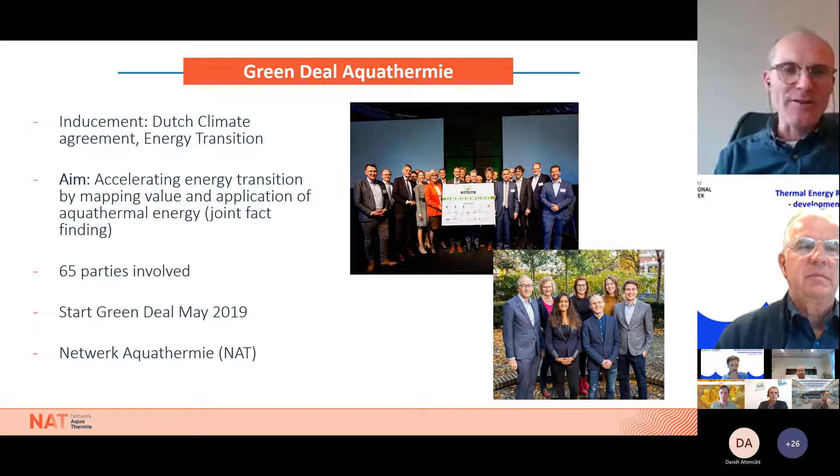Okay, and then I'll fasten. I had specific knowledge challenges on technology, on the potential itself, and how to fund it, how to do the governance, which role does everybody play, which party, and of course the impact on the environment, so the impact on the water system and the ecology. I will fasten through this really.

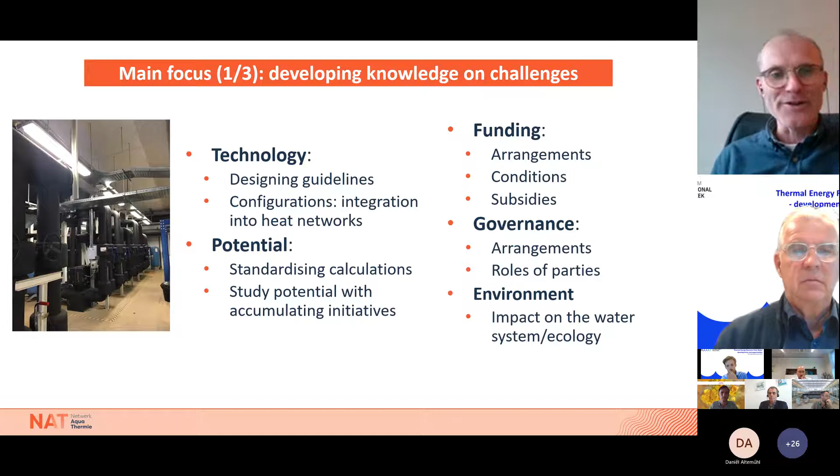So next one, to number 8. Then the sharing of the knowledge. We wanted to share the knowledge not only within the parties involved with the Green Deal, but also everyone who gets involved with the energy transition and the heat in the built environment specifically.

So we built this site. We have an inventory of the realized projects, and we put that on aquathermie.nl. Of course, on social media too, and we had communities of practice, for instance.

To number 9. And then we try to broaden and deepen the network. So more parties should be involved, and everybody should know about the investigations we made or other parties have made. So we try to really centralize the information in total, and of course securing this knowledge through agreements with several parties.

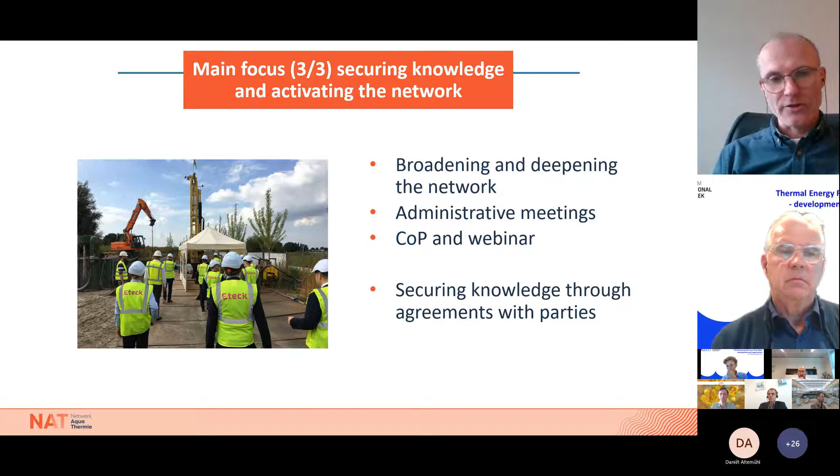So to the next one, number 10. What we see is that there's a really rapid growth of initiatives, even more than 125 now. And well, we made a sort of forecast that we think 200,000 households could be installed with aquathermal energy in 2030.

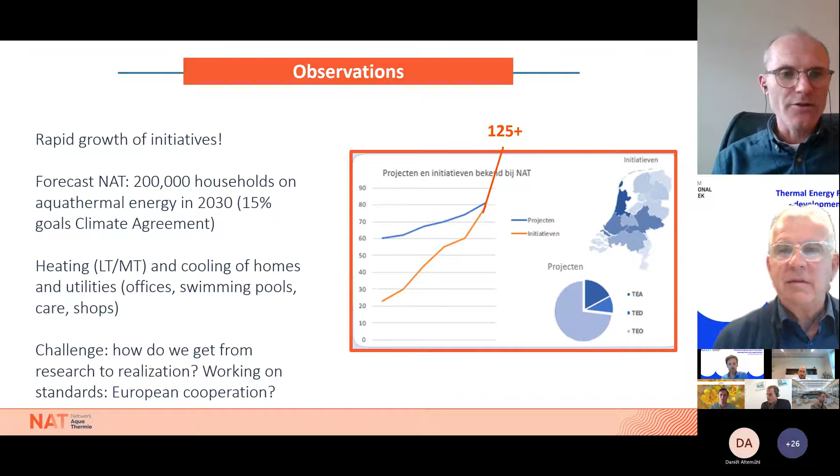One of the main challenges is how do we get from research, with what we've done the last 3 years, to realization. Maybe it's possible to work on European cooperation. So this could be a start today. And this is actually what I wanted to present.

To start off with, I want to focus or get your attention on some major challenges we have in the urban area. One of them is energy transition. We heat our houses with natural gas, and it has to be replaced by a sustainable system. This has a large influence on people's neighborhoods, inside their houses, and as we see now, also in their wallet. Water quality is suffering from an abundance of nutrients, often combined with a lack of flow, and that causes algae growth, especially in the hotter summers.

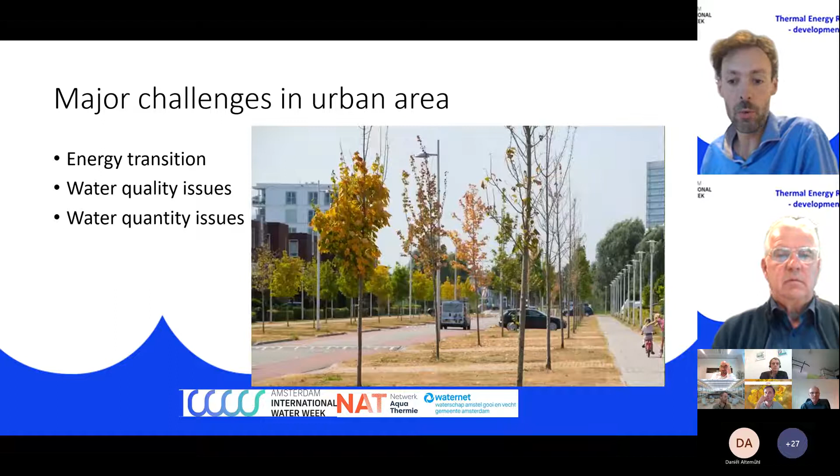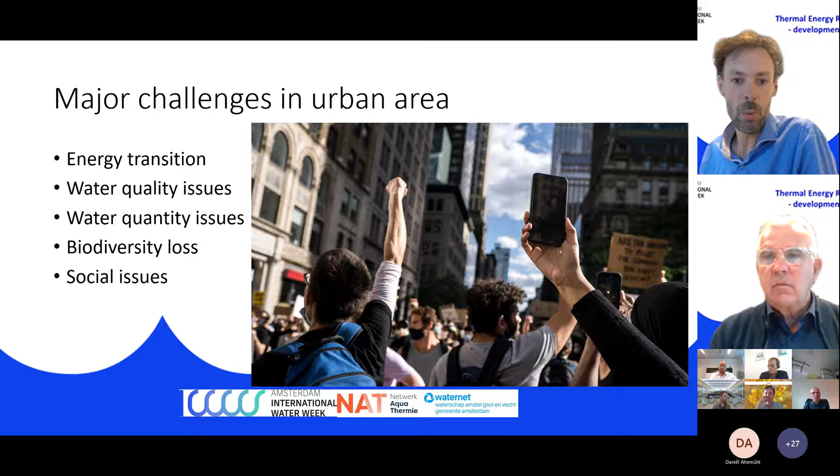With climate change, we see longer periods of drought and more frequent intense rainfall events. Biodiversity suffers from a shortage of green space and often also monocultures. And with all these problems, and many more that I haven't mentioned yet, people are getting continuously challenged by those changes, and they raise their voice to object against the impact it has on their lives. So if you want to tackle these challenges, we need to come up with integral solutions. We cannot afford to think per sector. We need to look for a more integral, sustainable way.

So let's have a look at the thermal energy recovery from some surface water and how this process works. Henk has already told you about this. Our goal is sustainable heating of houses and buildings, and the means we have is heat from surface water.

What we actually do is pump large volumes of water through a heat exchanger. What do we need for that? Pipes underneath the ground, and also a technical building where you extract heat from the flow.

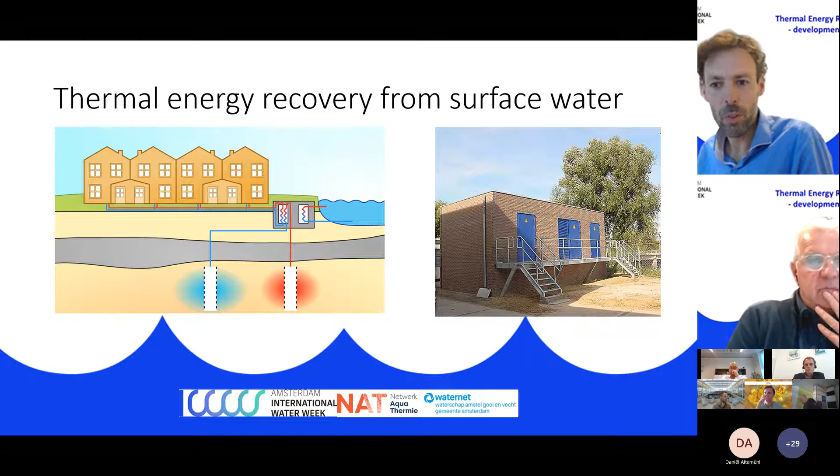The energy transition stagnates if current methods of city development remain unchanged. So we have to deal with it differently than we're used to. Then the thought came up to us: what if pumping is an enabler for the integration of sustainability? What can pumping do more than just extract heat?

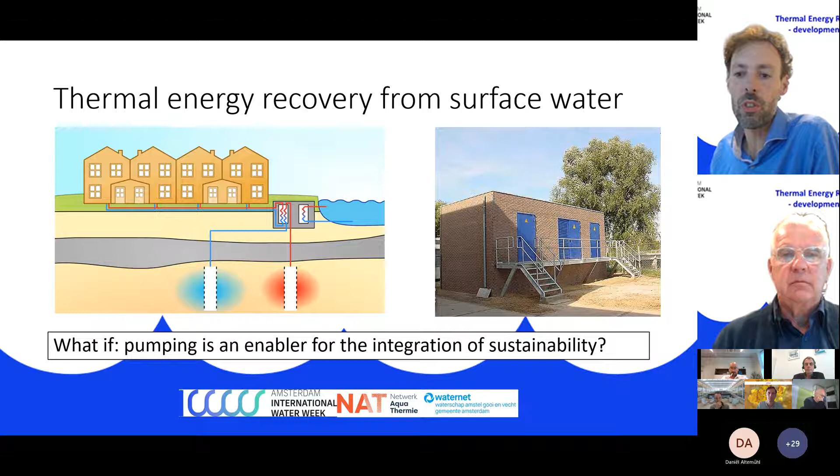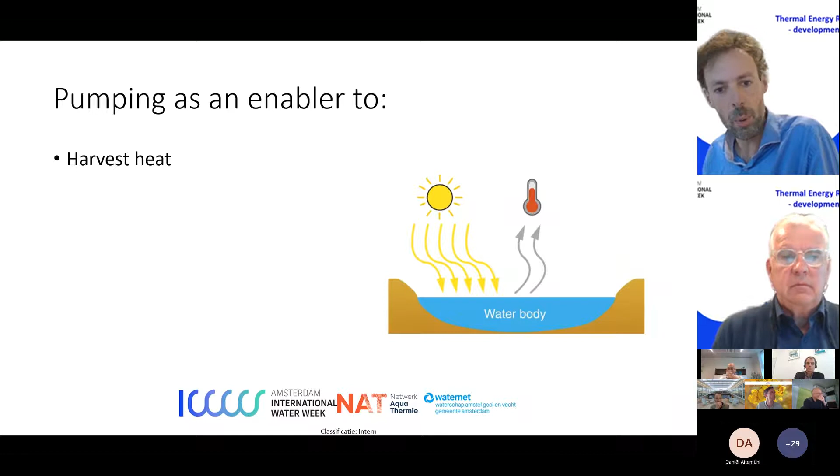So we continued from there and researched this question. First, by pumping water through a heat exchanger, you can harvest heat. But also, if you pump water, you already have it in your hands, and that gives the opportunity to filter nutrients. There are often too many nutrients in our water system, causing algae growth, so let's get rid of them.

We want to increase biodiversity, which can happen if you start pumping water in the ditches. Water starts moving, and that can cause water quality improvement, but also by cooling water, there are opportunities to improve the biodiversity.

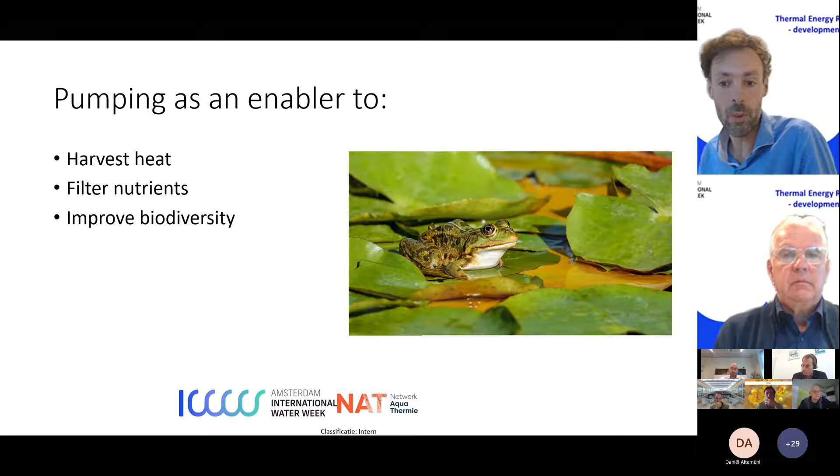After heat has been recovered from surface water, what we do now in the thermal energy project is hide the stream - we put it in a pipe and it returns to an open water body. But we miss an opportunity here. We might as well show the water returning over land instead of hiding it underground. This gives opportunities for recreation, but also for biodiversity when designed in a nature-friendly setting.

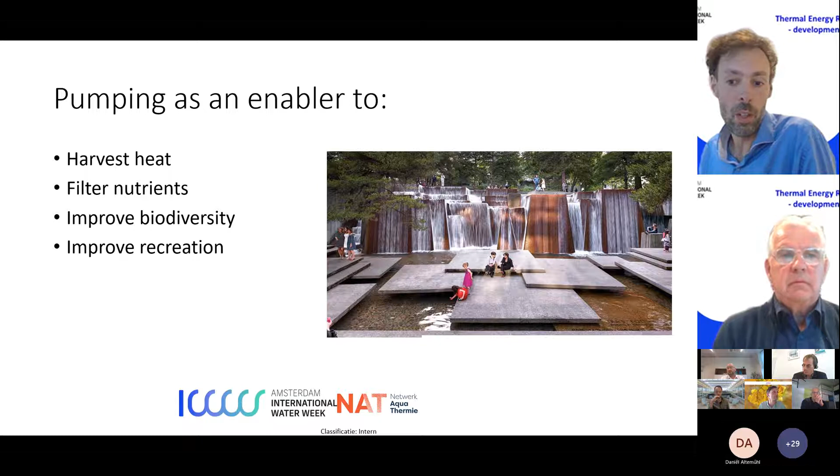We can also improve water management by, for example, infiltrating that returning flow of water into the ground in periods of drought, or maybe drain the ground in periods of rainfall.

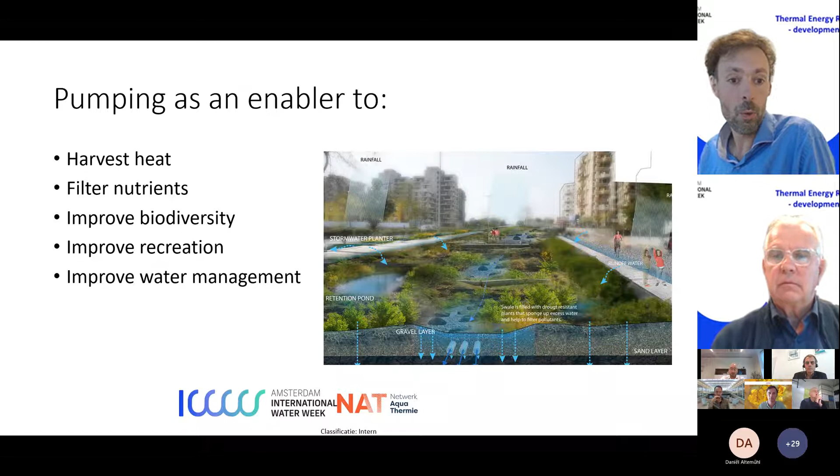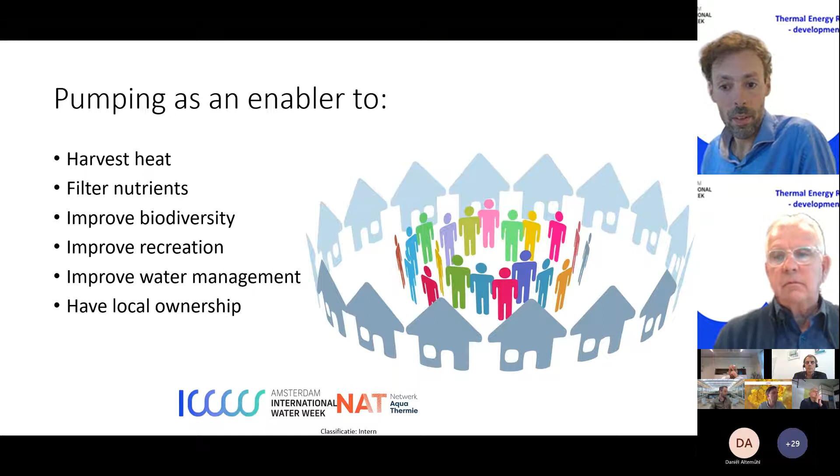As Henk already said, this system is very local, and that gives opportunities to have local ownership. People can organize themselves in an energy corporation and have their own heating company with heat from the neighborhood for their own neighborhood. That last thing is happening right now in the neighborhood called Oostoever, in Amsterdam.

The story I just told you, we took that along and went to the local energy corporation, and they said, okay, we have this idea and we want to challenge you with some questions.

This neighborhood has about 1,100 houses. It's built at the end of the last century, and it's next to a large lake, the Sloterplas, which has water quality issues due to an overload of nutrients flowing in from the surrounding area.

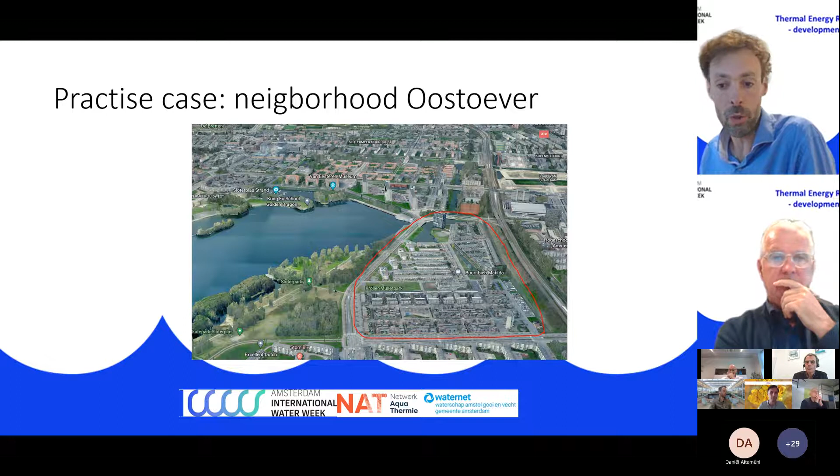First thing we did is we used our online tool, the omgevingswarmtekaart, and the tool is a fast way to figure out what the heat demand is of a neighborhood, but also what the heat availability is from different heat sources in the surrounding area. This tool shows that there is enough heat available.

Heat is available from the sewer systems, but also from the Sloterplas. It's very large, so there's more than enough to heat, I think, up to 100,000 houses around there - or well, let's say 30,000 from the models, but I think it's much more. So it's more than enough for this neighborhood. So we chose this surface water body as a source for this neighborhood and continued from there.

We wanted to look for integral sustainable solutions - so not only extracting heat from surface water, but what other sustainable goals can we achieve?

To do this, we applied a method called the integral design method, geared to programming public areas in an integral manner. In this method, public and private parties work together from an early stage, and the goal is to connect multiple opportunities to ensure that developments lead to a better social and healthy living environment.

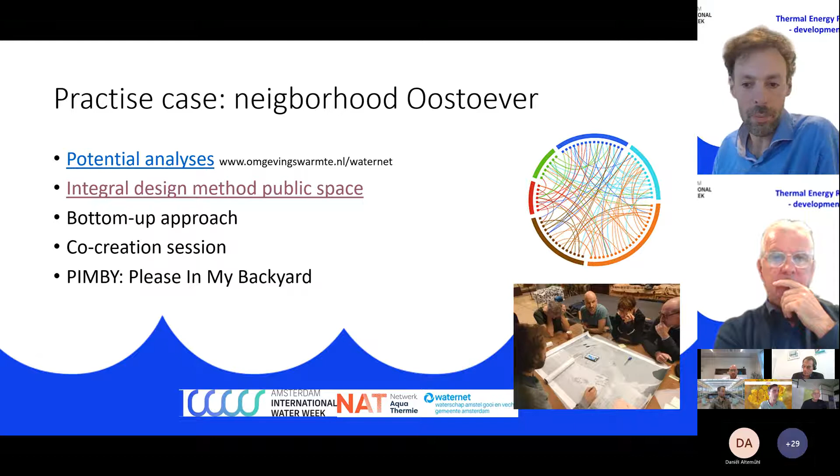We also asked the residents under what conditions they would gladly have a technical room in their back garden — so, PIMBY: please, in my backyard. In the next slides, I'll show you the results from this exercise.

First, we looked at how the building could look — a technical room — and we came up with different shapes, maybe with a street artist's work on it, or packed with green walls.

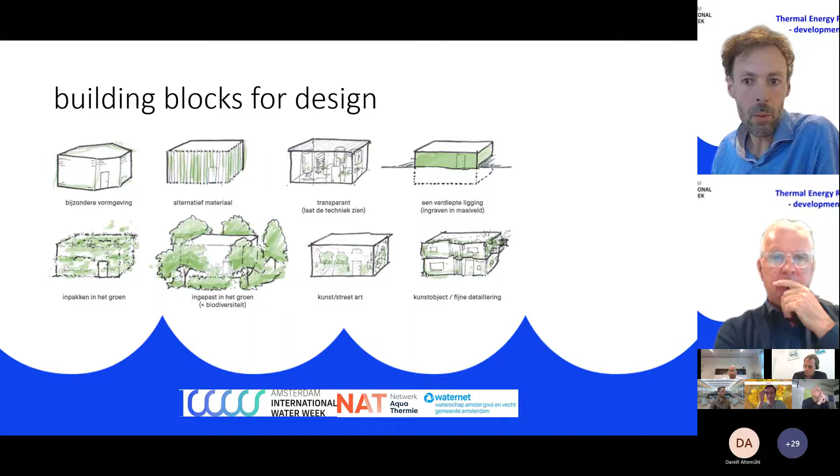We also looked at the outlet, as mentioned before. You should maybe show the water instead of hiding it. So it could be a fountain, maybe a cascade, or a playground for kids, a pool.

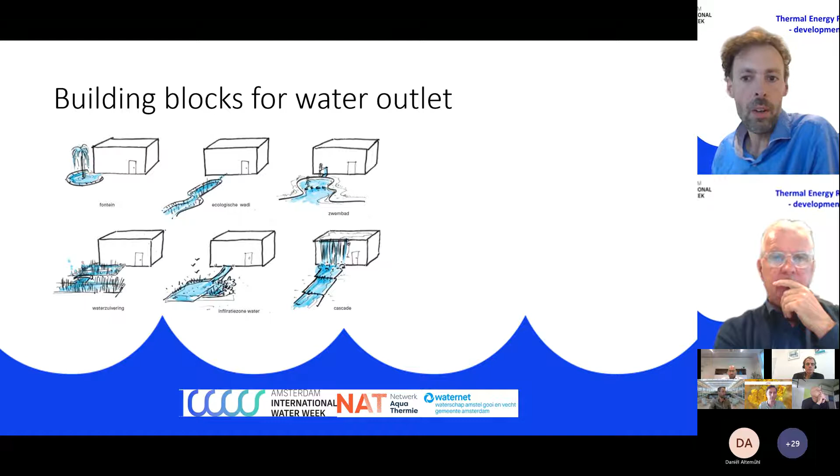We looked for multifunctional use of the building — not only a technical room, but maybe a play object, or combined with a public space utility. For example, a public toilet, or lockers for people who want to go running and store their shoes. It's next to a lake, so maybe swimming equipment.

It could also be a landmark for the neighborhood as a recognition point, or a way to invite people to see what this new technology looks like, or you can make it part of nature. There's a park zone as well, so maybe you can make it part of that park zone.

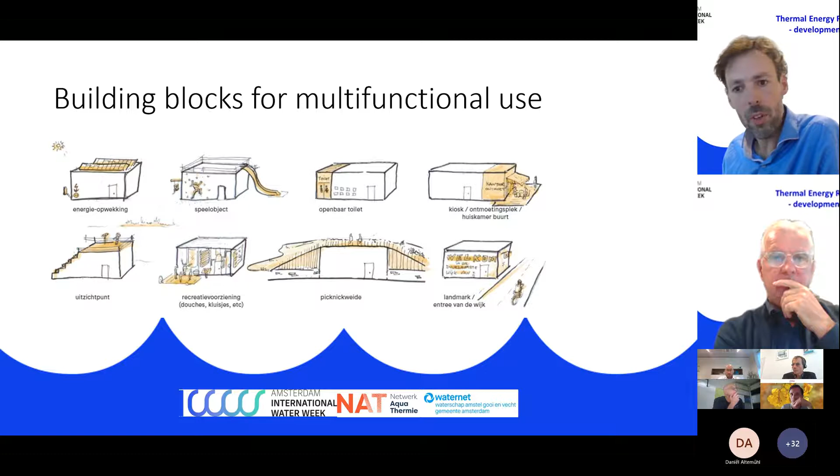The residents came up with all these ideas, and in the end we focused on three different solutions. These possible solutions are concept ideas. I'm going to show you one of them.

There are old fermentation tanks in the area. It used to be a treatment plant, and we thought all these tanks were used — one is an apartment, for example. But the residents pointed out that one of the tanks is probably empty. It has no roof, and at first it was thought to be a storage place for water.

We found out it's probably empty, and it's of course a very nice idea that you have an old building that's not being used. It used to have a water function, and maybe you can use it again for the new water function.

Then we found out that the ditches on the back side of the area have bad water quality, mainly because they're not flowing. The idea now is that you can pump water from those ditches, bring it through pipes not too far, to this old fermentation tank, harvest the energy there, and then let the return water flow towards the lake and make it visible.

How, we don't know yet, but make it attractive to the neighborhood. Then, before the water enters the lake, have a reed bed filter to filter the nutrients. This is the basic idea we have right now, and it has to be further researched in a feasibility study.

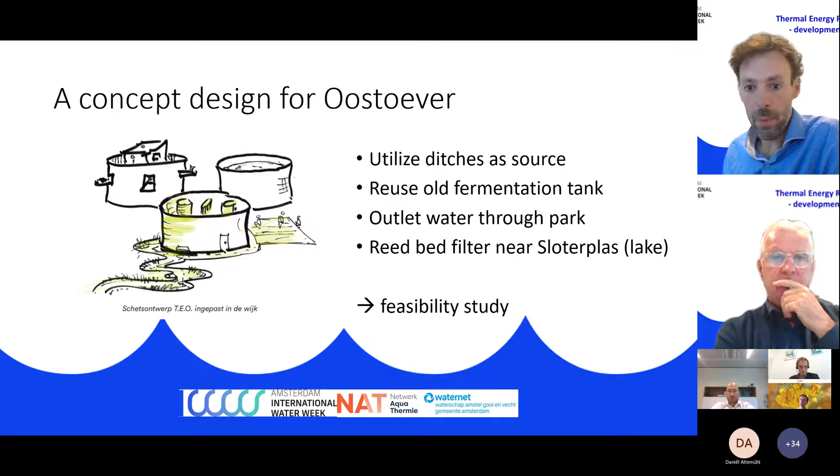Thank you very much, Harry. That's a very nice statement you made at the end — let the customer be first. There are a few questions. Is the ambient heat map usable at EU level?

I wish that would be true. We put a lot of effort in there to make it usable for our own area. Other water boards or water organizations are starting using them as well. There's another map, I think Henk already told us about that, used for a national level. I think any country or area that really wants to push this technology forward needs a map like that to make it visible and accessible, so it's easier for parties to hop on and exploit this technology.

Okay, thank you. And another question from Michiel: does it take into account existing systems, thermal, in outflow of those? The map I just showed? Yes. So for example, the high temperature district heating system is also in there. So any source of heating is included in the map.

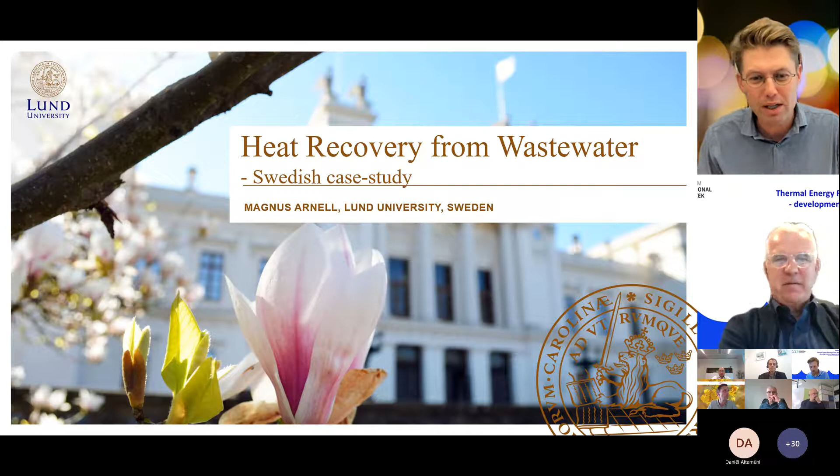Thank you very much for the kind introduction and for inviting me to come here and present to you. I hope you can see and hear me and see my slides. Excellent. So I will focus primarily on heat recovery from wastewater. And you were asking for a term, and the one that we have been using is wastewater heat recovery, so in short, WWHR, that I will also use in this presentation.

So if you look at the urban water cycle, from extraction of raw water, production of drinking water, distribution, using it in households, collection of wastewater, and treating it before discharging it back to nature, 10% of the national energy use typically goes into the urban water cycle, and 90% out of that is used for heating of tap water by customers. That means there's a large energy potential being practically wasted today.

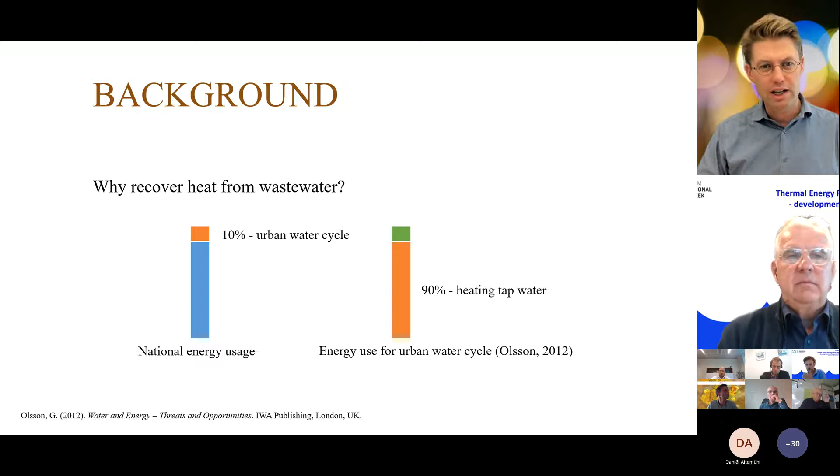And it is possible to recover this energy. It could be done in household appliances, primarily showers, but also washing machines, etc. It could be done on building scale, on the exit wastewater from buildings. And doing it very much upstream has a higher temperature. On the other hand, a low and quite variable flow, making it more feasible typically to do it with heat exchangers rather than heat pumps.

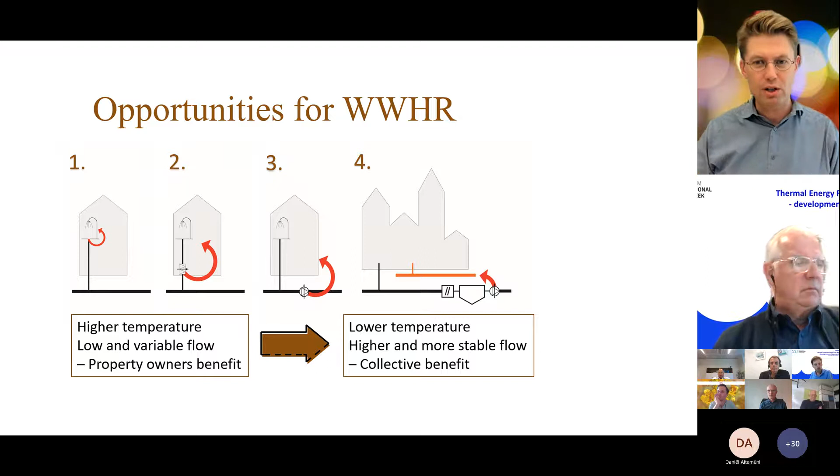Then we can also do it in wastewater sewers, and in the end at the effluent of the wastewater treatment plant. Doing it down closer to a treatment plant or in the main sewers, some of the energy is lost to the ground surrounding the sewers. But on the other hand, the flows are higher and typically more stable, and that means we can do it with heat pumps. Another important difference is that if you do it on property level, typically the property owners get the benefits from the heat recovery, while doing it downstream, it's more of a collective benefit for the utility or the utility customers.

So is there then a risk with doing heat recovery in wastewater? Now I will be talking very much from a Swedish perspective, saying that Sweden is a cold country. We have a cold climate, and that means the wastewater, the raw water, is typically quite cold during winters. And the wastewater treatment plant biological treatment processes rely on the heat that is also added via the hot tap water.

Recovering heat upstream of the wastewater treatment plant poses a risk of lowering the influent temperature, thereby impacting the performance of the treatment plant. Before our project, no one had done this analysis on a system level: if you recover heat upstream, how much would the influent temperature at the treatment plant actually be reduced?

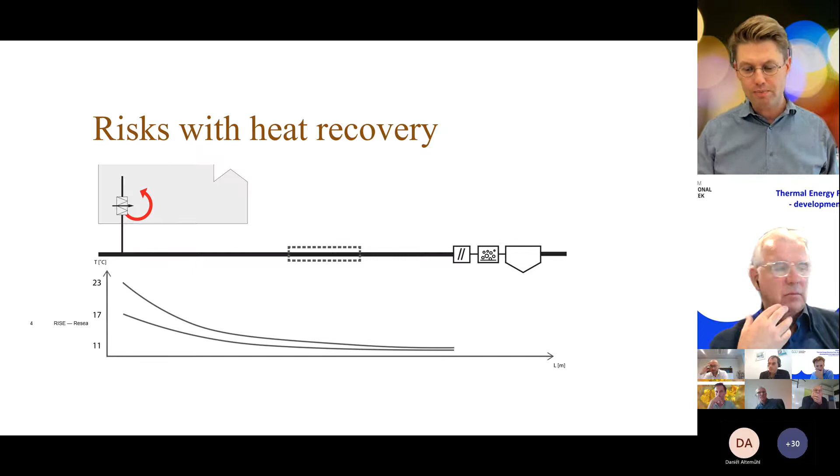So we set up a large national research project in Sweden between Lund University and the Research Institutes of Sweden, with 3 different water utilities involved, funded by the national research funding agency, Formas.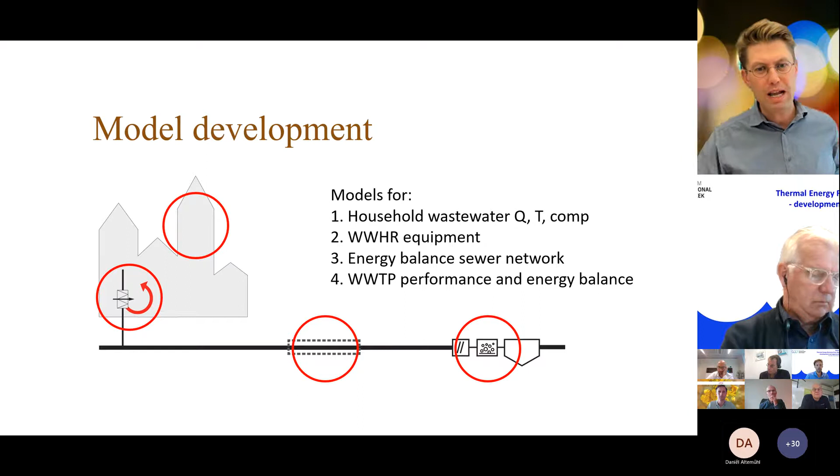To do this system-wide analysis, we developed a model tool covering both the wastewater from households, flow, temperature, and composition. The wastewater heat recovery equipment was modeled, along with the energy balance in the sewer network, and the performance and energy balance of the wastewater treatment plant. We then connected all of this for a system-wide study.

We had 3 case studies in our project: the city of Malmö, where we modeled a large part of the urban catchment; the wastewater utility Käppala in the northeast part of the Stockholm area, which has a large tunnel system that was modeled, including their treatment plant.

And then we have the city of Linköping, the 5th largest city in Sweden, where we modeled the whole catchment area and the treatment plant. I will focus now on the case study from Linköping.

The wastewater flow to the treatment plant is 42,000 cubic meters daily, corresponding to about 180,000 person equivalents.

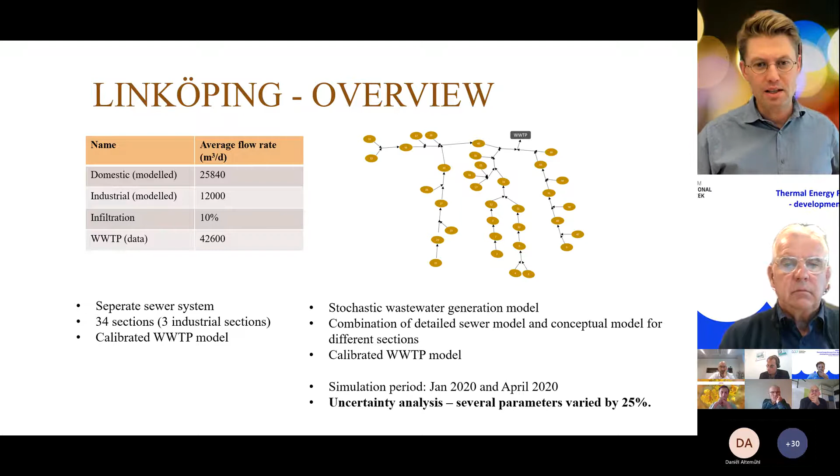We modeled the whole sewer catchment area in subsystems and connected that to a calibrated wastewater treatment plant model, combining all of the subparts developed in the project. We simulated 2 periods, one in January and one in April 2020, and added an extensive uncertainty analysis where we varied sensitive parameters in the models.

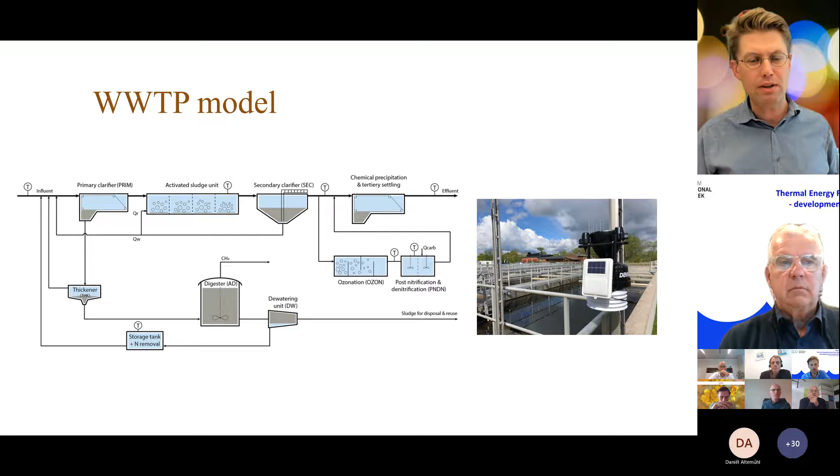It's interesting to say something about the treatment plant. In the main line, it's a quite traditional wastewater treatment plant with activated sludge treatment first, with intermittent aeration, but then they also have a post-denitrification process using an MBBR process, moving bed biofilm reactors, which I will come back to as it impacts the results.

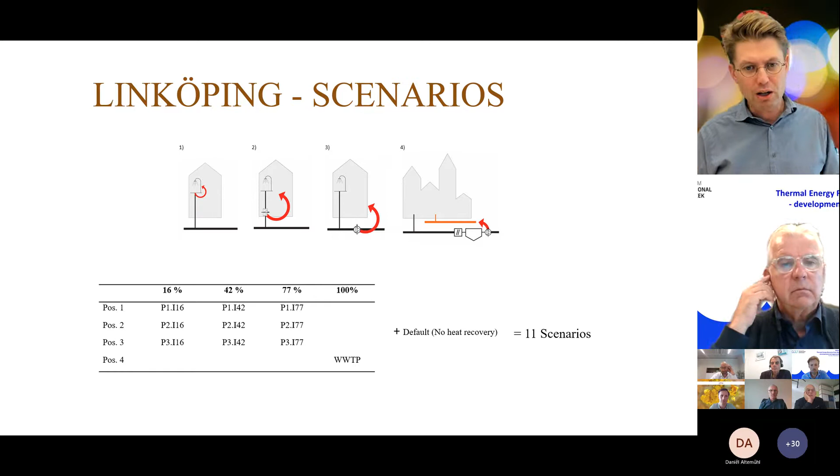So then we had the whole catchment, the whole city, the whole treatment plant, and we implemented in the model scenarios where we tried 4 different positions for wastewater treatment heat recovery, at different degrees: 16%, 42%, or 77% of the total wastewater, compared to the default scenario with no heat recovery.

Looking briefly at the results for total flow and influent temperature, we can see that we modeled the flow quite accurately. The data for temperature is substantially smoother than the model provides, but the average for the model is very close to the average of the data.

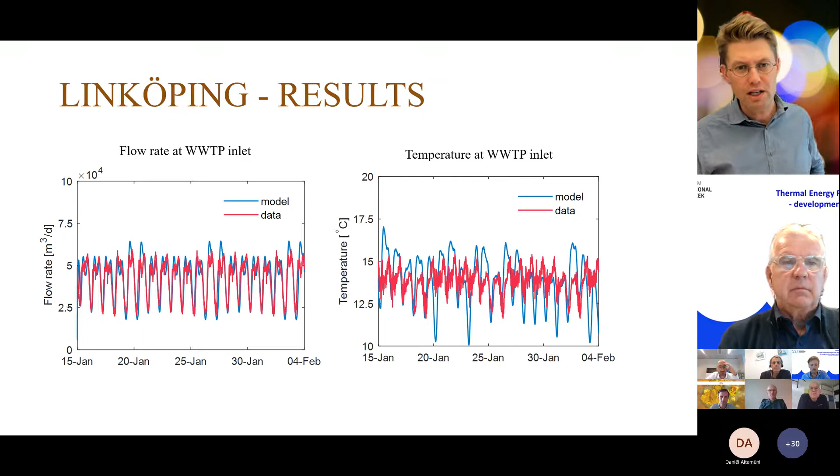So for the results, first, energy recovery. The maximum heat recovery in all of our scenarios was in position 1, heat recovery at showers in buildings, where we could recover on average 120 to 330 kilowatt hours per person per year.

More energy could only be recovered with heat pumps in main parts of the sewer systems during summer. Heat recovery at the effluent of the houses, position 2, provided some 95 to 185 kilowatt hours per person per year. It's also interesting to note that it's not only the recovered energy that benefits property owners, but also the reduced peak power demand.

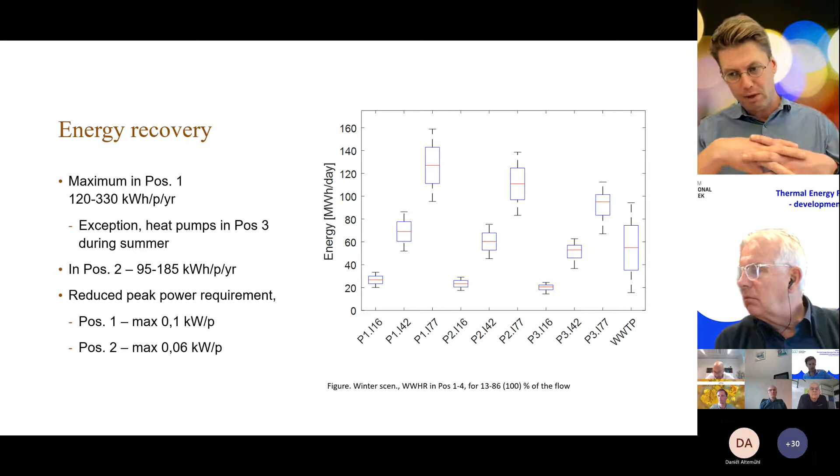Most property owners have some kind of power tariff on their heat from district heating or on electrical power, meaning their peak power demand over a year or month sets their fixed tariff rate. By reducing that maximum power demand, they can save not only on the kilowatt hours, but also on the fixed rate of their power or heat.

The temperature at the influent to the treatment plant was reduced by a maximum of 1 degree compared to the default case, when heat was recovered in position 1 at the maximum rate of implementation. We were surprised that this was actually quite a limited impact.

The effluent from the buildings shows a larger reduction, up to almost 6 degrees, but that narrows down, and by the time it reaches the treatment plant, only a 1 degree reduction is left. If we did heat recovery in position 3, with heat pumps in the sewers on a large part of the wastewater, we could get up to a 2.5 degree reduction.

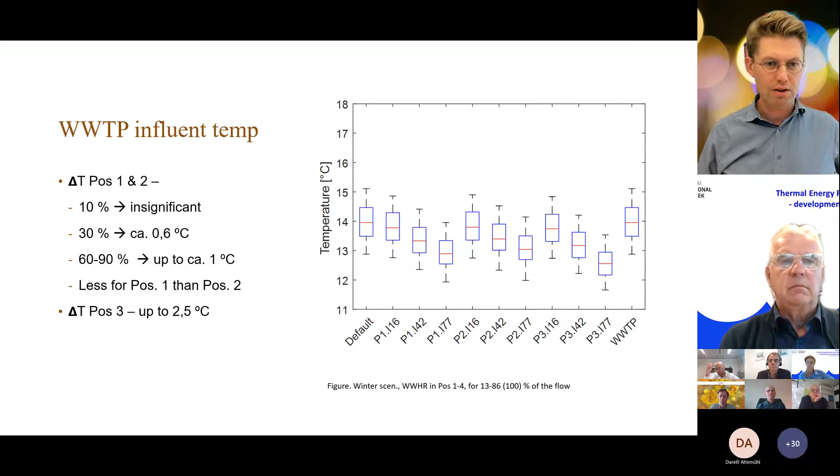How does this impact the wastewater treatment plant then? We primarily looked at the nitrogen, the biological nitrogen removal at the plant, and it's actually a very small impact on nitrification and total nitrogen removal at the plant.

We did also enforce a larger temperature reduction up to 3 degrees, which, just to remind you, we couldn't simulate in the catchment, but if that would happen anyway for some reason, we couldn't see any large impacts on total nitrogen removal in that case either. Slightly higher, but not dangerously high.

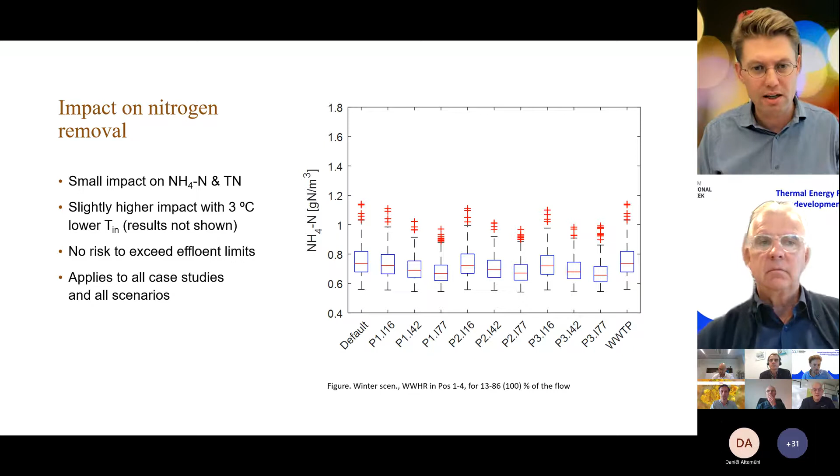So just some other details. As I said, the ammonia reduction we were looking at just recently was for the total effluent of the plant, but they have separate different nitrogen removal processes at the plant. So one could wonder, how would it be at the secondary settler effluent?

The alteration in temperature also impacts the aeration energy and the carbon addition at the plant. This would be quite specific for any treatment plant, so that would have to be evaluated case by case.

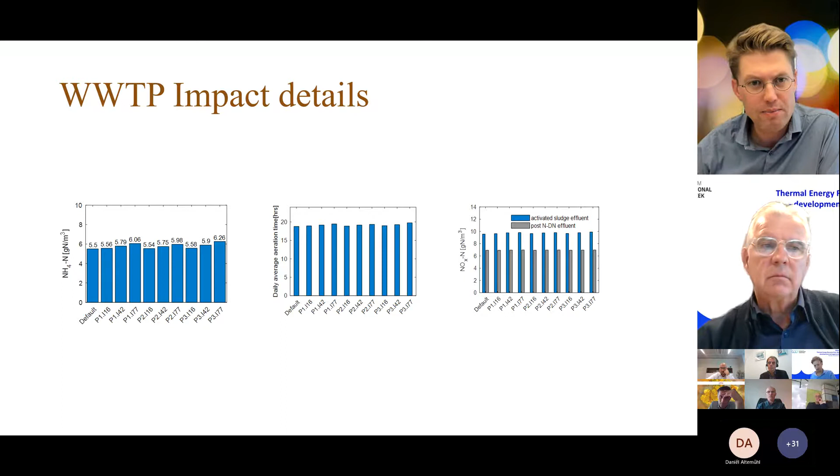So coming to my conclusions, we can see that for the effluent of the building, wastewater heat recovery can lower the temperature by up to 5.5 degrees Celsius. At the same time, that only means up to 1 degree Celsius reduction at the wastewater treatment plant influent.

If we are doing heat recovery with heat pumps in the sewers for a large part of the wastewater, then we can have higher reductions. In general, upstream heat recovery did not have any major or significant impact on the nitrogen removal at the wastewater treatment plant.

And it depends on where we implement it also. So yeah, I think that was my main take-home message.

There is one consideration, of course, and that is that even if we are not seeing an impact on the effluent limits today on the treatment plant, it might mean that the total capacity of the plant is reduced. So by lowering the temperature, even if we don't violate the effluent constraints today, if they have an increasing load prognosis for the upcoming decades, it might mean that they hit that upper level a few years earlier.

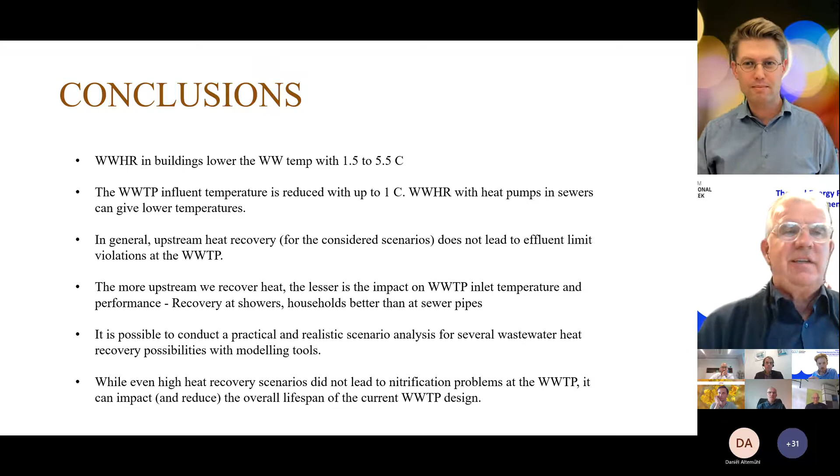Can you say a little bit about the costs of the different scenarios? We did not investigate the cost in such a way that we calculated the cost for installing heat exchangers in the different positions. We did calculate only the energy recovery in terms of kilowatt hours. That could, of course, be converted to euros or similar, but we did not do the cost calculations in any more detail.

What was the effect of the soil temperature in which the pipes are? Yeah, that's one of the most influential parameters in the model. We did model the soil temperature, so we have a varying soil temperature over seasons in our model, and that's a very influential parameter, yes.

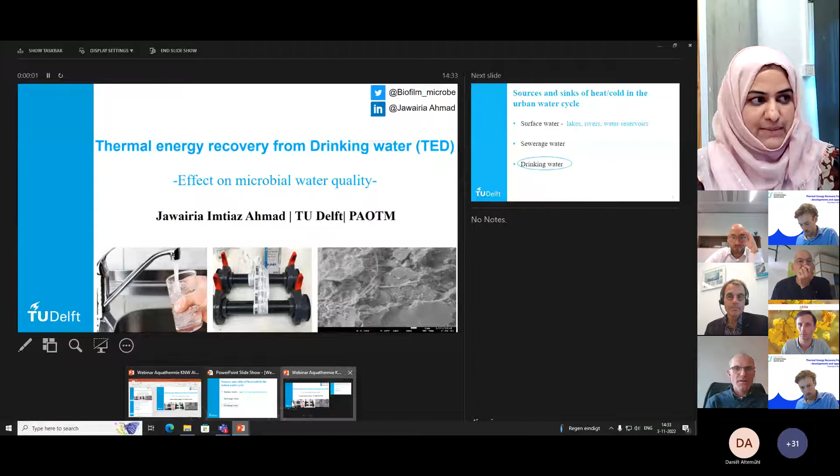Is it visible now? It was visible, now it's not visible. Now we see your screen of TU Delft. Yeah, is it visible now? Yeah, yes it's clear. Yeah.

Okay, good afternoon everyone. I'm Jawairia Imtiaz Ahmad. I recently finished my PhD, I'm going to graduate in December, on the 14th of December. It's very nice that I hear the story of surface recovery of thermal energy from surface water and then wastewater.

Now we are moving to the third part of the urban water cycle, that is drinking water. If we recover thermal energy from drinking water, what are the effects on microbial water quality? So we are covering the whole urban water cycle.

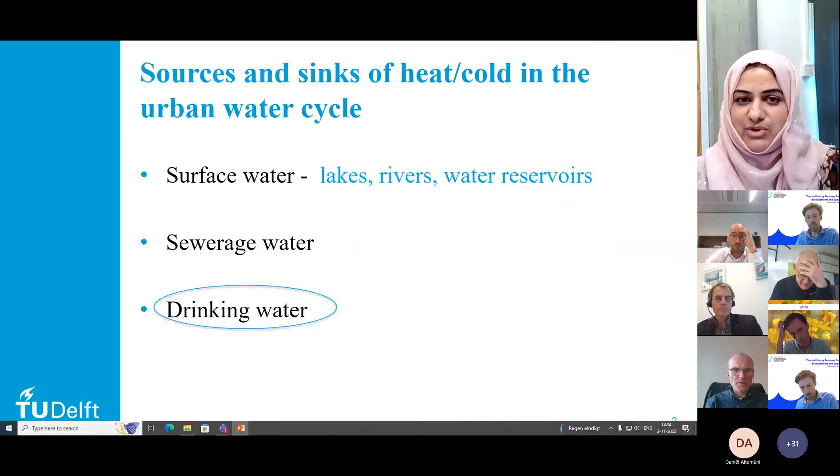If I talk about drinking water distribution systems, it means that drinking water in the Netherlands - I'm specifically talking about the Netherlands where we drink water without any disinfectant added. So it's microbially safe and stable drinking water. In the Netherlands, we have around 120,000 kilometer long distribution networks, and every year 10 drinking water distribution companies distribute around...

...1,160 million cubic meter of water. So that is a lot of water for 17 million of population.

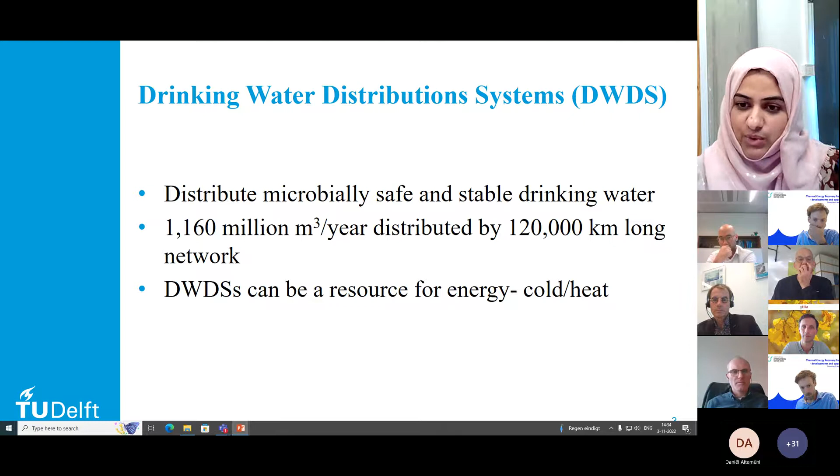But there is also a source of energy recovery. There is a potential of both cold and heat. So first we look at cold recovery because there we see more potential, because most part of the year the drinking water temperature remains below 20 degrees in the Netherlands.

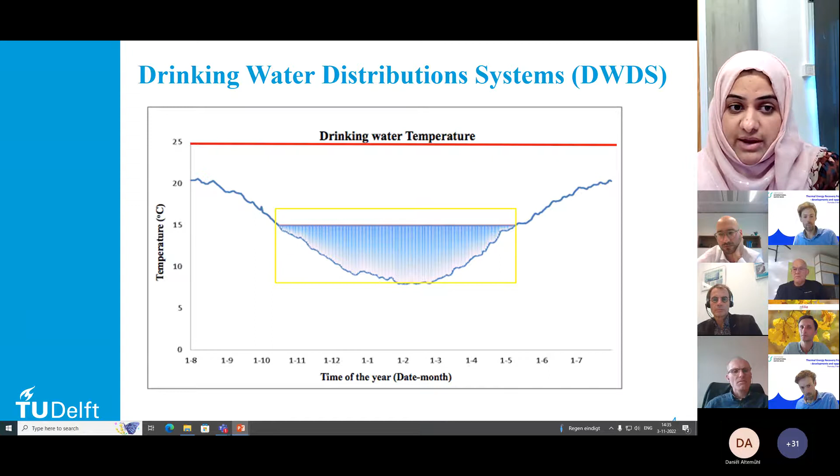Here you can see the window of opportunity where we can recover cold from the drinking water, because according to the Dutch drinking water regulations, the temperature of the drinking water should not be higher than 25 degrees within the distribution networks. So we have this window where we can increase the temperature of the drinking water after recovering the cold from it as thermal energy, and then not go beyond 25 degrees.

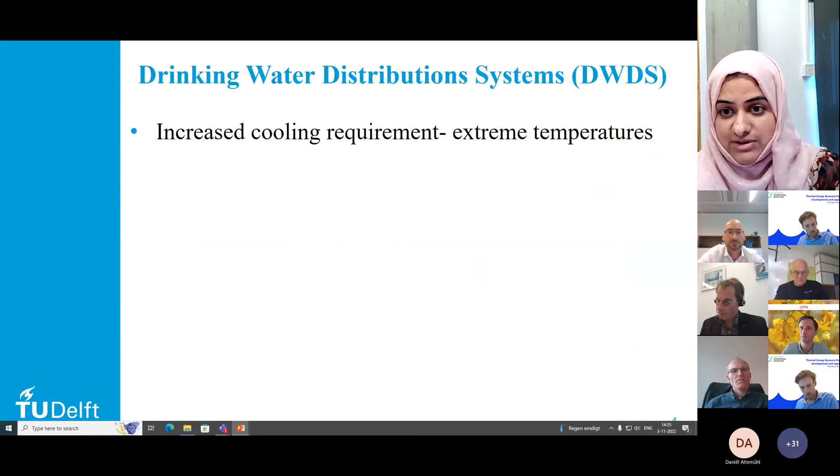And why do we want to recover cold? Because there is more opportunity, and also because of the extreme ambient temperatures. As we see the warm summer this year, like a hot summer, that means there are increasing cooling requirements.

There was a case study that said the cooling requirements only for the non-residential buildings in Amsterdam is around 2,161 terajoule per year. And the cooling potential from the drinking water distribution systems of Amsterdam is around 2,800 terajoule per year. So we see a lot of opportunity for cold recovery in Amsterdam and overall in the Netherlands.

Now the point came that okay, we recover cold during the winter, but actually the need for the cold is in summer. So we have aquifer thermal energy storage systems, and other energy sinks, which can be utilized for saving the cold in winter to be utilized in the upcoming summers. And this will help, of course, in reducing the carbon footprint.

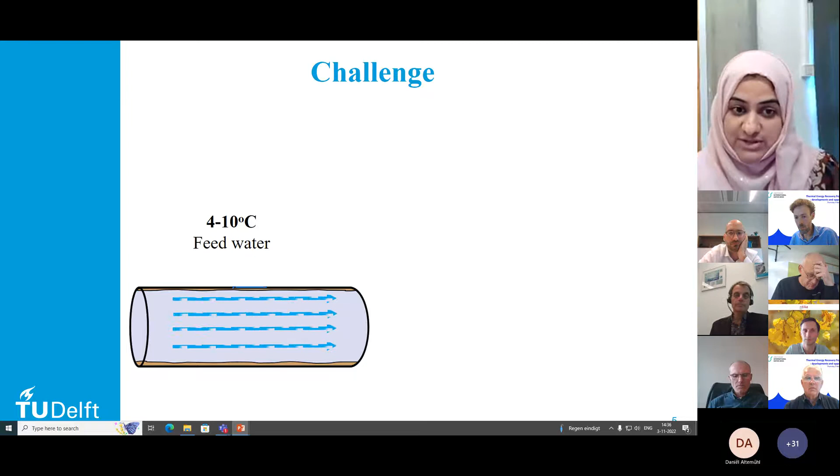So we have an opportunity to recover the cold. The cold is available in the form of drinking water, and we have technology available - heat exchangers and aquifer thermal energy storage systems. So what is the challenge?

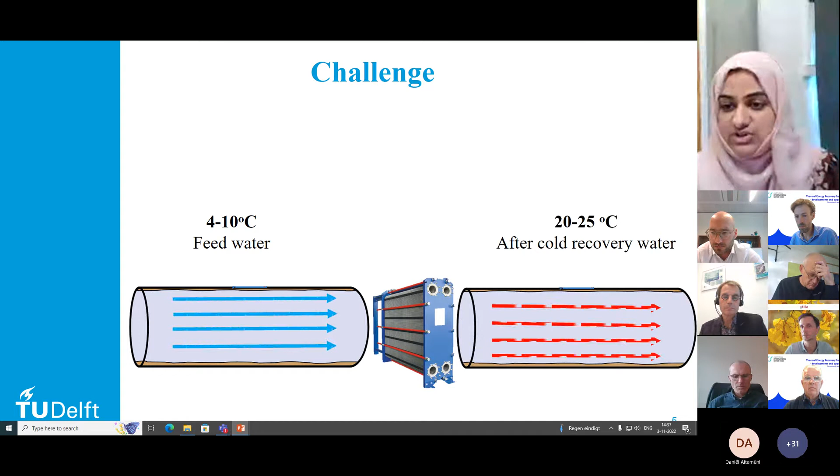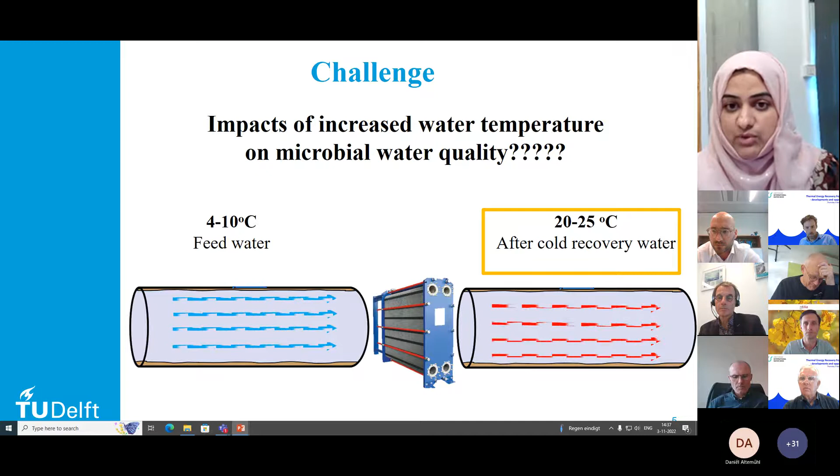The challenge is that we will increase the drinking water temperature, but how will it affect the microbial water quality? Because especially for the distribution networks in the Netherlands and a few other countries where we distribute water without disinfectant, how are we going to maintain the microbial water quality when the temperature is being increased?

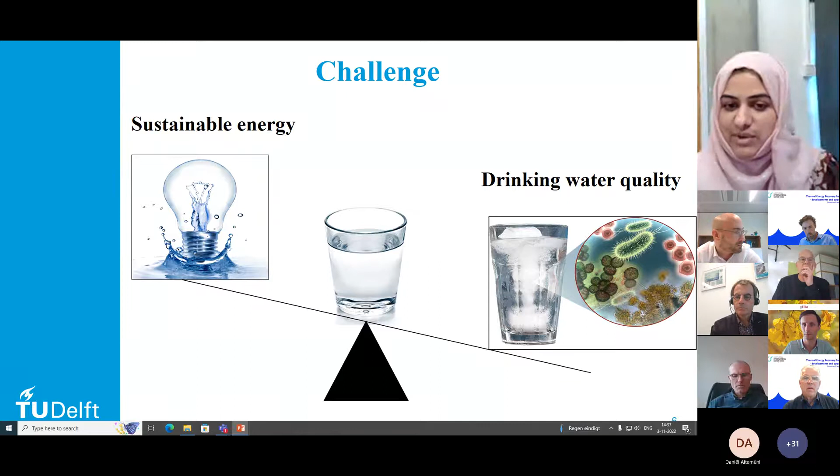Sustainable energy is a good thing, but we don't want to compromise the drinking water quality, because that's the prime aim of the water utilities - to provide safe water. There were some knowledge gaps that we started 5 years ago to answer.

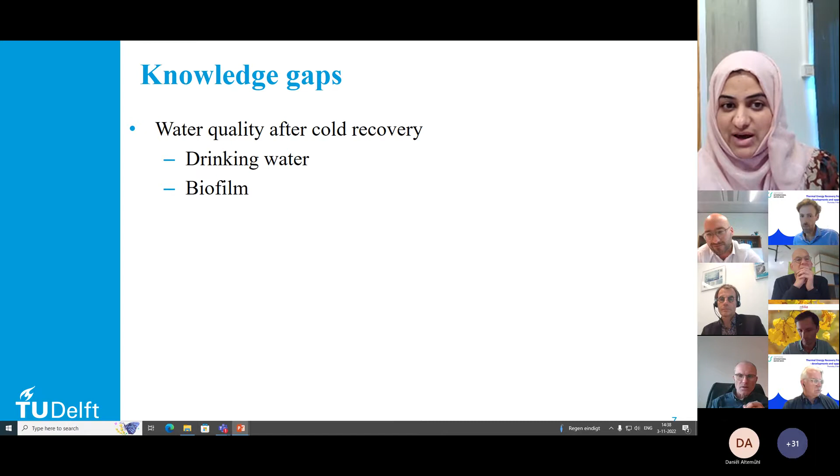Water quality, not only in the drinking water phase, but also the biofilm - that's the small thin layer that is being made inside the walls of the pipe. For people without a background in microbiology, you can see the biofilm when you put water in your glass and let it stay there for a few days. When you empty it, there is a slime layer that's called the biofilm.

Then we ask, what is the maximum temperature? Shall we go up to 25 degrees, or maybe beyond? Then we have more window. And the temperature difference matters too - if it's 4 degrees and we go to 25 degrees, there is a difference of 21 degrees. That will also make a difference when we talk about opportunistic pathogens, because they have some special window to grow after the temperature is increased.

And then the last part of this research was heat exchanger location - shall we place it on service lines, like the heat exchanger to recover the cold?

And then even people can get warm water at home. In the winter, they have to utilize less energy to warm up their water. We have to put it in the reservoir, like the big water pipes before the reservoir, so it will have less impact in the house.

So there were some questions. We started with the pilot study at TU Delft with 3 distribution networks: one with cold recovery, where we set up the max temperature of 25 degrees, and one where we put non-operational heat exchangers, just to see the extra material effect, since it's drinking water and we really want to be very careful.

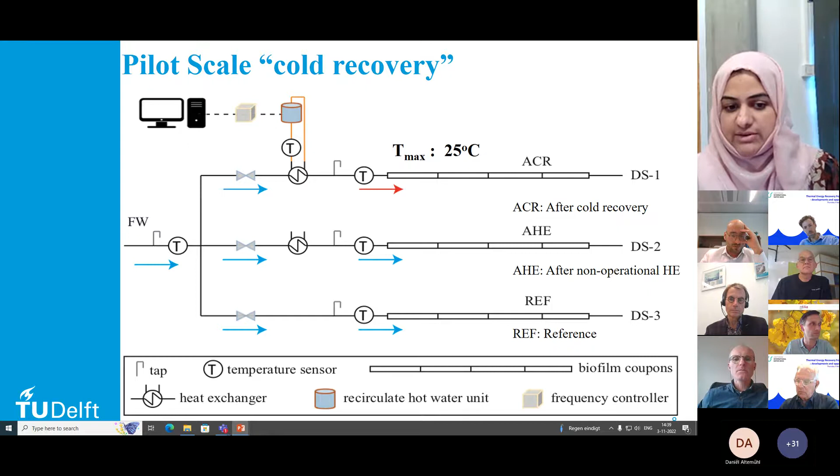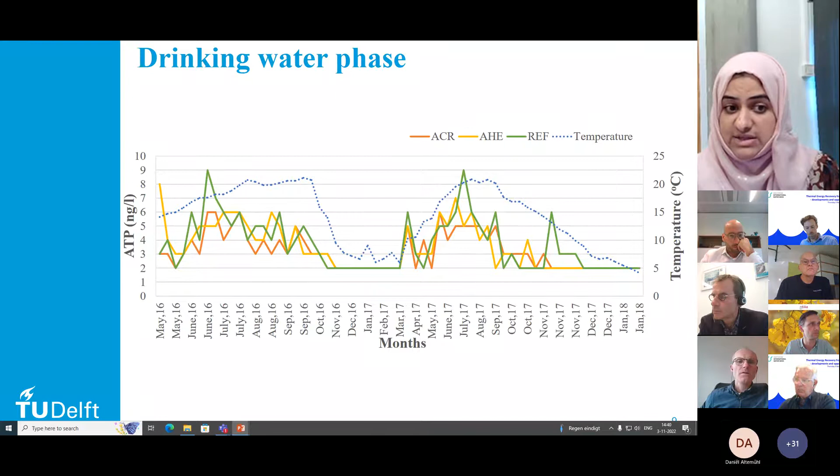The third system was the reference. So the results - this is ATP, one of the methods that measures the biomass within the drinking water phase. With this, we checked the cold recovery system, the non-operational heat exchanger, and the reference system, and the dotted line is the temperature. We did this research from May 2016 to January 2018, and we saw that there were actually fewer differences between systems.

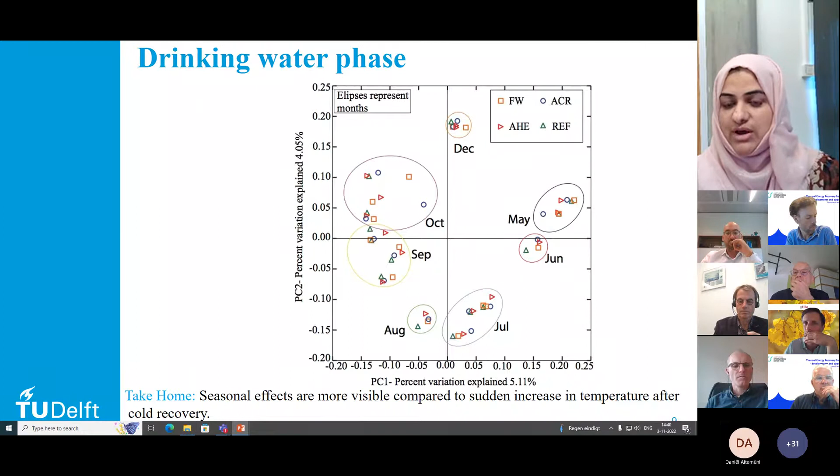Keep in mind that this water came from a treatment plant that took water from surface water. So there we have more effects of seasonal temperature change, rather than the water we take from, let's say, North Holland, where we use dunes to treat the water.

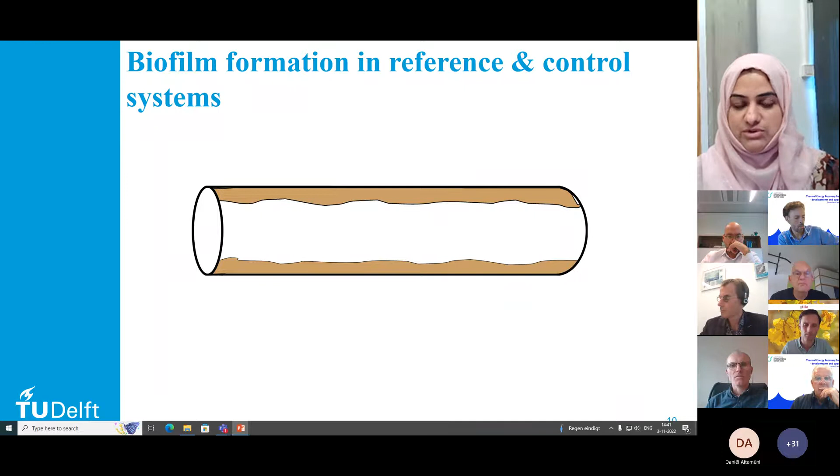And then we went into the biofilm formation from 7 days in the reference and control system until 700 days. We see that biofilms within unchlorinated systems get stable after 84 days - we don't see any changes after that in terms of microbial community composition, but the biomass was changing.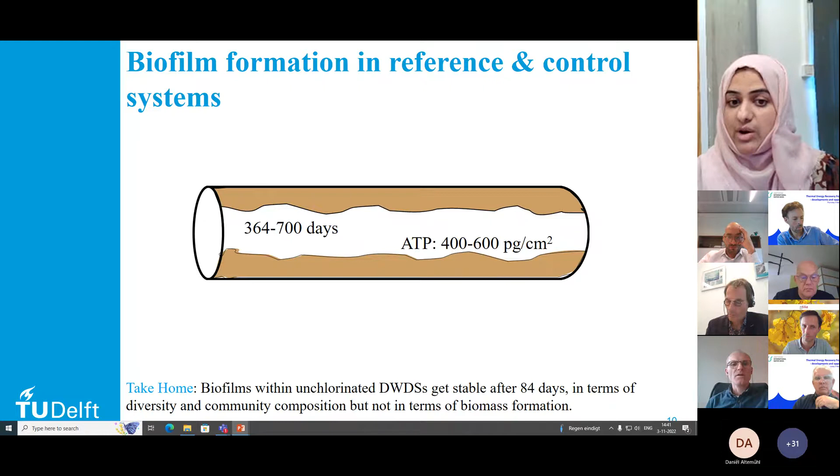In the after-cold-recovery system, we also see that the biofilm gets stable even earlier compared to the reference and control system, where the temperature was more fluctuating, compared to the cold recovery system, where temperature was set at 25 degrees for 700 days. So that was also kind of good news for us.

Opportunistic pathogens were more critical in terms of temperature changes. So I'm only showing Legionella, which gets more of our attention. Here is the number of samples that we measured.

If the Legionella is present in the feed water, then it definitely... everybody wants to mute their microphone because we have some noise.

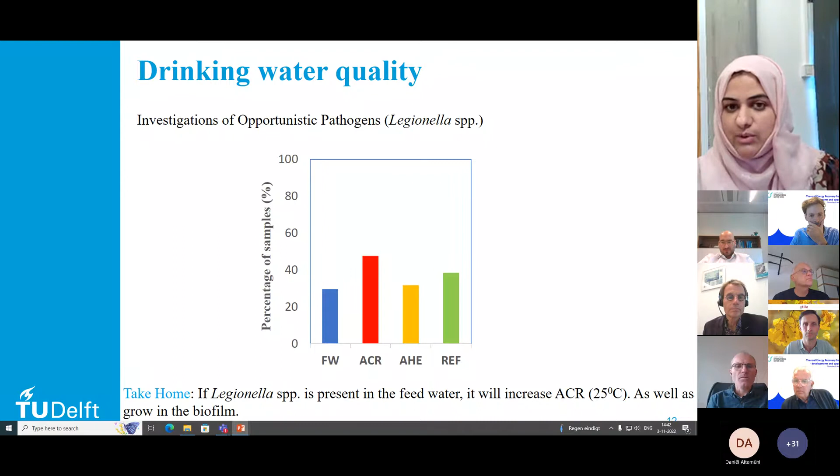After cold recovery, of course, it will increase. But if they are not present, then there is no chance that they will regrow after the cold recovery system. So we are safe from a drinking water perspective, from a biofilm recovery and biofilm growth perspective.

Now, what should be the Tmax? Shall we go till 25 degrees, or shall we go to 30 degrees even, to get more cold recovered out of the system? Then we did another study.

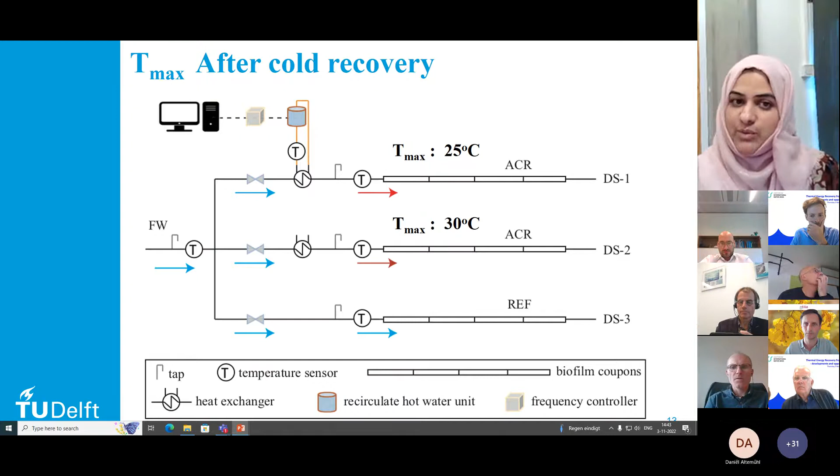In the drinking water phase, we don't see any changes between 25 and 30 degrees and our reference system, because in that water, opportunistic pathogens were not present, so not detected, so they were not increased after cold recovery.

We traced the biofilm for 224 days, and there was less biomass in the cold recovery system compared to 25 degrees and the reference system. That was also a kind of authentication, because we already did it for another water in an experiment, and there we also saw that the biofilm after cold recovery gets stable earlier, and the same has been seen here.

Opportunistic pathogens were not present in the feed water, meaning they were not present in the biofilm either, because the biofilm takes everything - all the microbial communities from the feed water, from the drinking water - and that grows inside the biofilm. So the feed water gets stable over time. It was a more stable feed water compared to our first experiment, because here we don't see much seasonal temperature differences, since the water goes into the dunes after getting treated. So there were fewer seasonal differences.

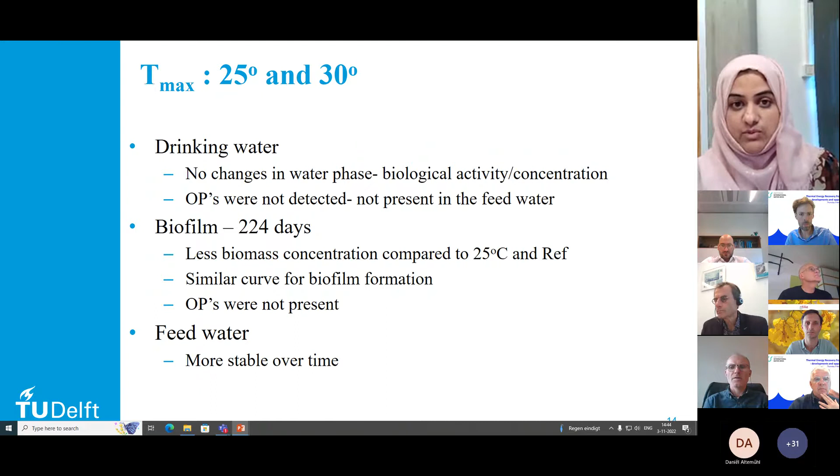Then comes another question: you go up till 25, 30 degrees. What if people complain that they don't want hot water at their taps? We did some modeling study and we see that almost after 1 kilometer from the heat exchanger, the water goes back to the temperature it was before the heat exchanger. So then we don't have any problem with the location.

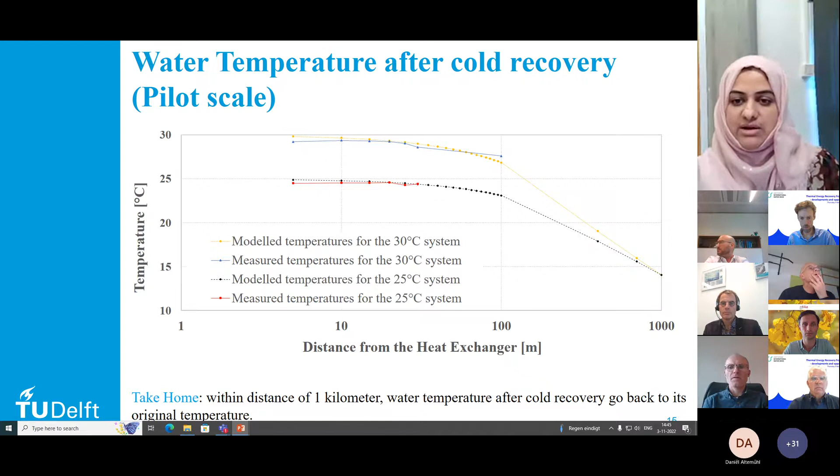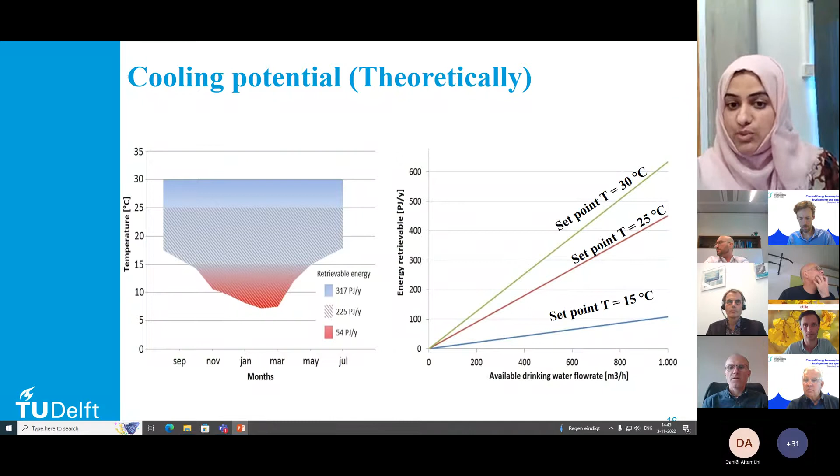It's known that 1 kilometer distance is a kind of roadmap we can take, that we should not place the heat exchangers within a distance of 1 kilometer from the service lines, let's say. And if we go from 25 degrees to 30 degrees, there is more potential for cold recovery.

The blood bank took heat and cold from the drinking water, from the big pipe coming from the transport line. They took it at 15 degrees. I think this year or last year, after our results, they went a bit higher, around 17 or 17.5 degrees, because it's safe to operate at this temperature.

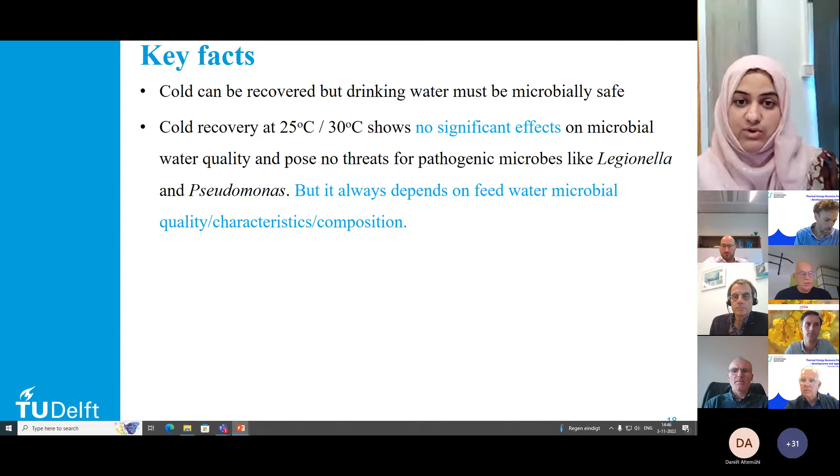So the key facts are that cold can be recovered, and it's microbially stable. In our research at 25 and 30 degrees, we see no changes in terms of opportunistic pathogens, but it always depends on the feed water quality. If it's true for the water networks we studied, maybe for another drinking water it's not true, because the microbial community composition is different. So a baseline study is very important.

In terms of biofilm, it reaches its stable stage earlier compared to other systems. And of course, when we go to higher temperatures, if there's a question about the water being hot at the tap, it's not true, because it goes back to normal—it mostly depends on the soil. The water temperature in the pipes is usually similar to the temperature of the soil.

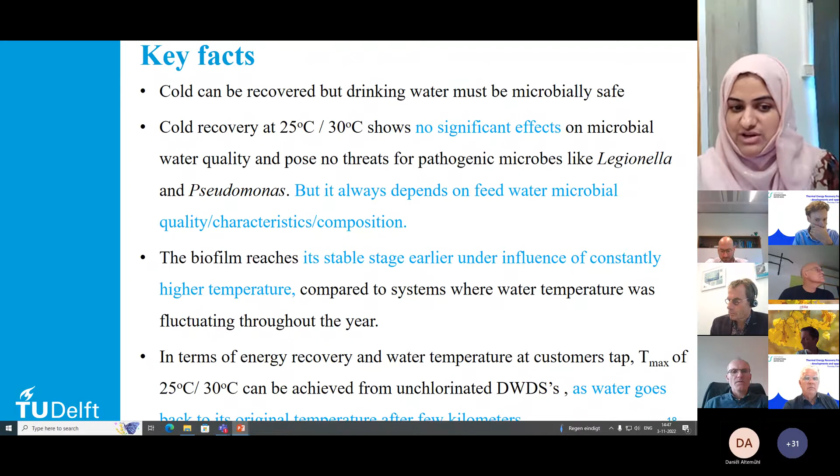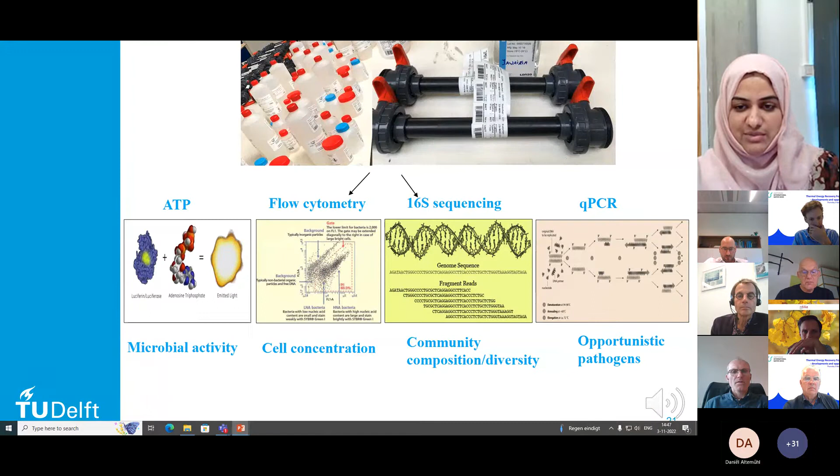So if it's in a big city like Rotterdam or Amsterdam, you have to study it differently within the cities. These are some glimpses of our experiments in Delft, in Leiden, in Waternet, and these are some of the analyses we use for both drinking water and biofilms.

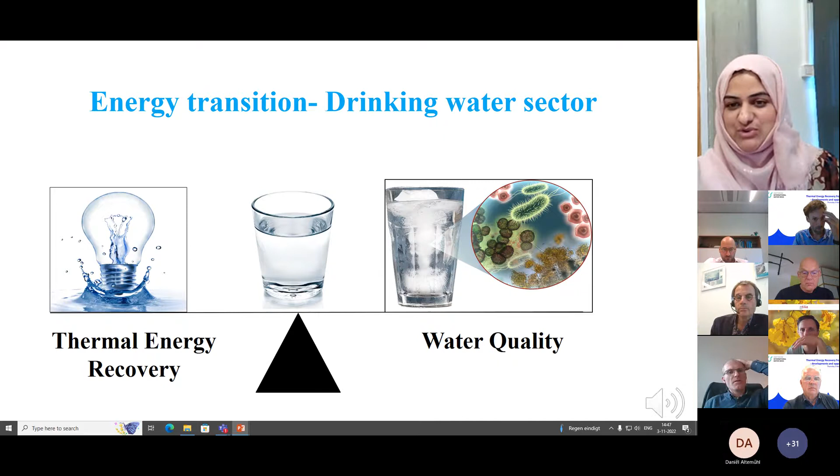I'm a good proponent of thermal energy recovery, but I really don't want to compromise the water quality, so it should be in a very balanced stage.